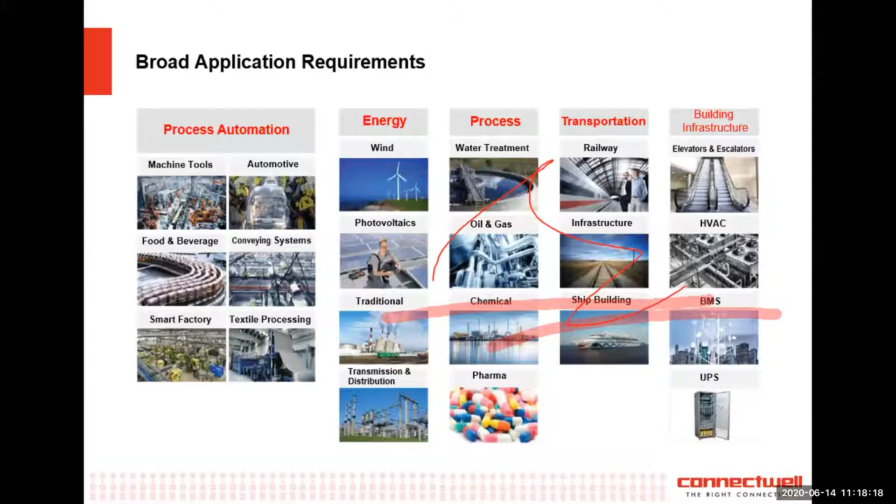Getting into where all we sell, these are the broad level sectors where we are present - process automation, energy, process, transportation, building infrastructure. The products find a very varied use. We are present in a lot of systems. It's a basic necessity for any sort of automation, power sector, engineered products, and hence our types of customers are varied. We have a vast range of industry segments that we cater to.

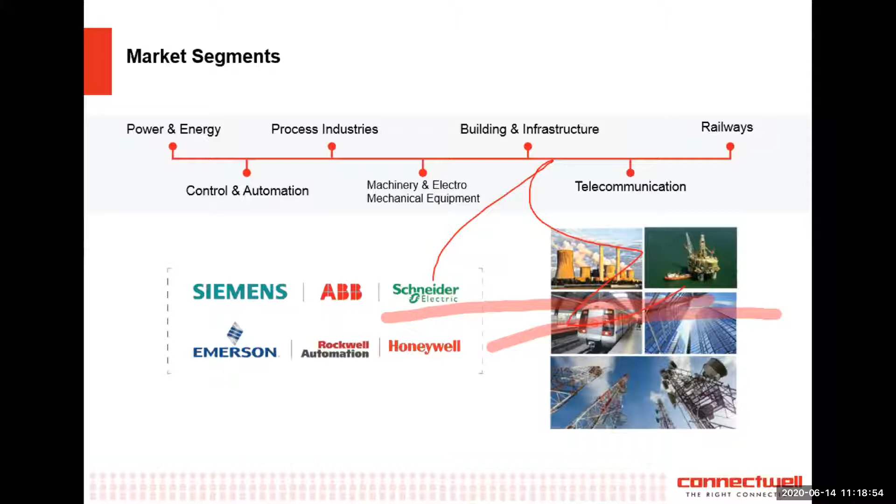From power energy to control automation to process industries, machinery and electromechanical equipment builders. We also are present in the building infrastructure area, and of course railways. We cater to a lot of leading industry people. For example, in the power area, we supply to Siemens, ABB, Schneider, Larsen and Toubro. In process areas, Emerson, Rockwell Automation, Honeywell, Yokogawa, a lot of machine builders, and also the rail transportation area.

We are present in India in a very wide network. We have over 140 dealers now, so that we can service our customers and be close to you. We have 7 regional centers all over India, right from Delhi, Ahmedabad, Pune, all the major cities, Bangalore, Chennai, Calcutta, Hyderabad, Coimbatore, and then our distribution network - Sriramji just touched upon this.

We supply to more than 60 countries now. We have our fully owned subsidiary companies in China, Brazil, and the United Arab Emirates as well.

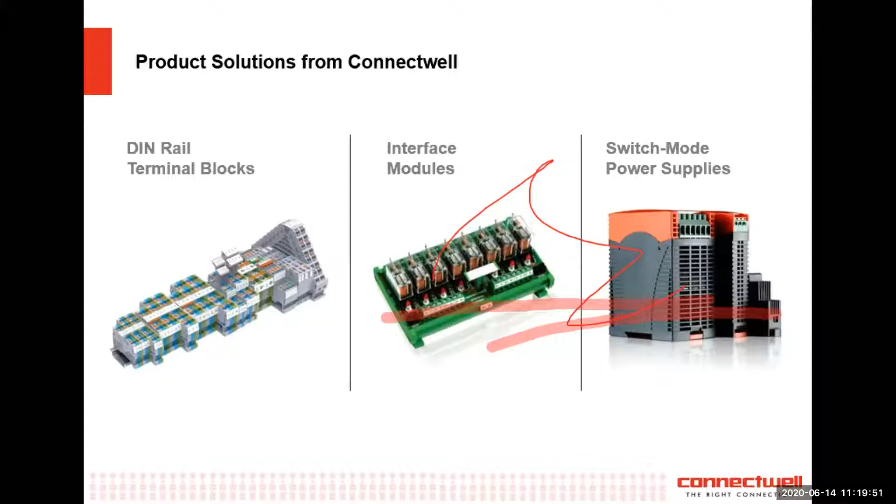Regarding products, we'll not get into it much, but at a broad level, we are industry leaders in the segment of DIN rail terminal blocks. We also have a huge line of interfacing modules that you can choose from, and of course switching mode power supplies.

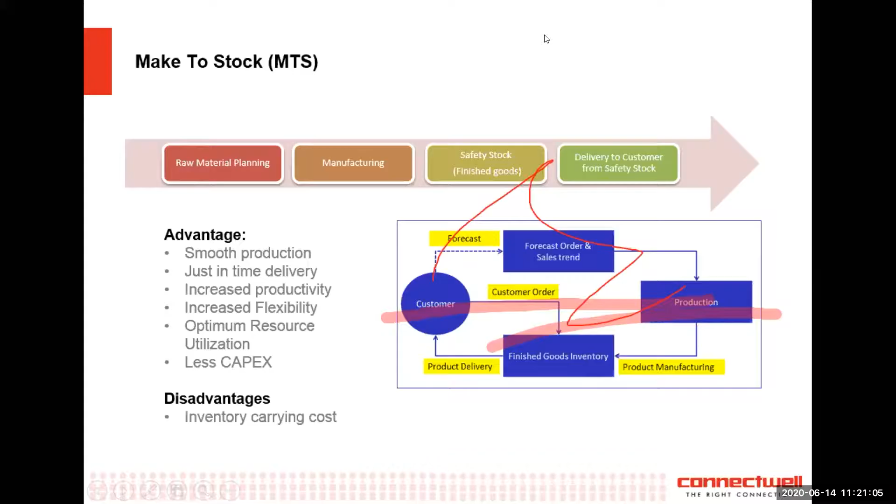Does everyone see the red mark on the screen? Like a sketch mark? Okay, so I need to - Dheeraj, any idea how to take it out? You need to go to your viewing options and disable participant annotations. I did that, but how do I get this red mark out again? Should I stop sharing and then share again? You have to stop share, then share, it will disappear. Okay, everyone please excuse me, I'll just stop sharing and reshare my screen so these red marks - it's a Zoom thing, we see it all the time. Just give me a minute. Okay Ishwar, you can see it, now the red marks are gone. Over to you, let me know when you want me to proceed further.

To handle it, we are following the MTS methodology. For MTS methodology, these are mainly 4 steps we are following - raw material planning, manufacturing, then safety stock, and delivery to customer. If you see the 4 lakh terminals as explained by Sandeep, there we have to arrange like 8 lakh screws, 8 lakh clamping yokes, the raw material required for the clamping yoke like steel, copper, and the plastic material like polyamide 66 required for that material.

For raw material planning, we are using the planning methodology that I will explain in next slides. Here, if you see the make to stock, generally it flows - we use the customer forecast as well as our internal analysis of sales trend. On that basis, we decide the safety stock to be kept item wise, and we review every month for any variations in that. After having the sales trend analysis, we decide the safety, and on that safety or stock basis, we decide our production.

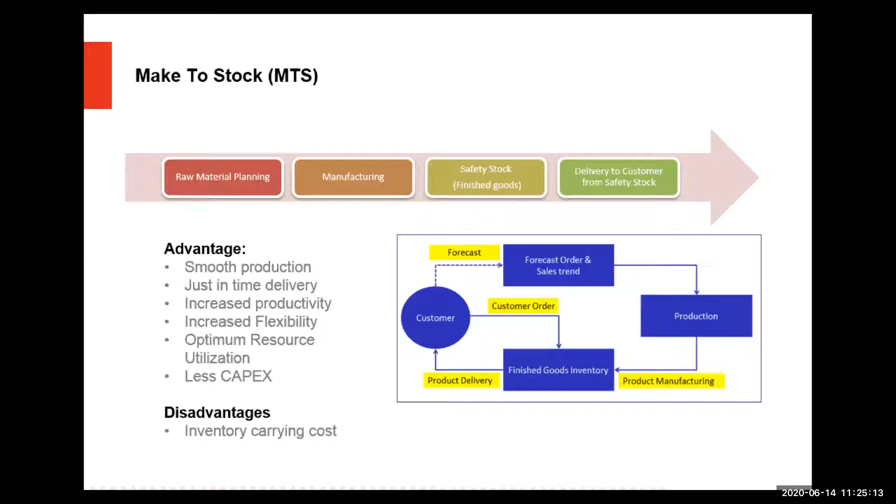Sandeep, please go to the next slide. Yes, one second, it's frozen for some reason. Just okay, got it, one minute. Yes, I got it, okay.

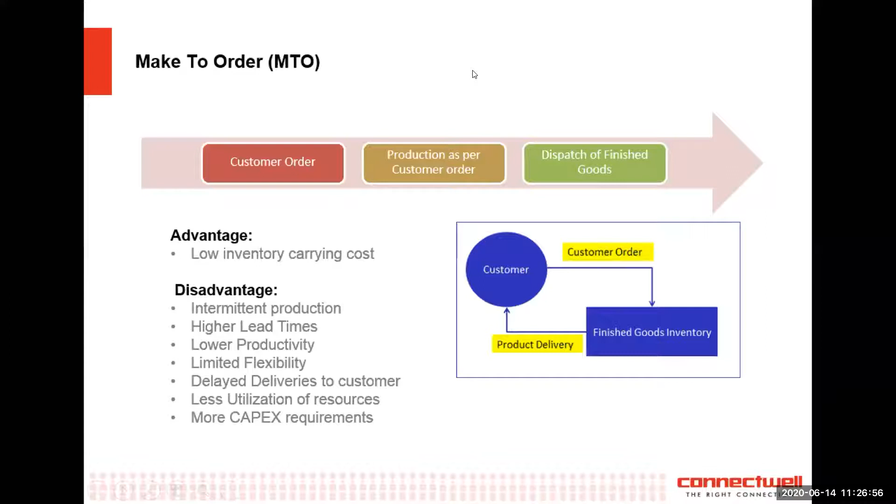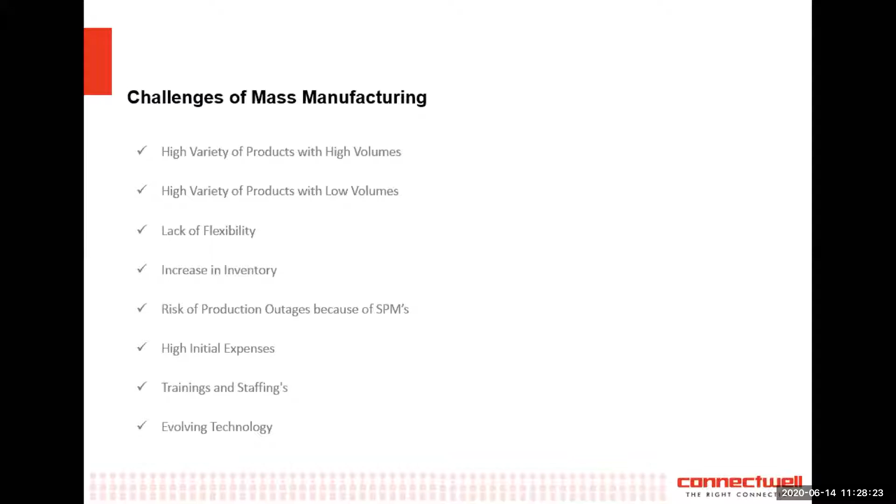And then yes, to run the SPMs or high-end machines, staffing and training is very, very important. So we need to engage our people and keep our workforce motivated. And yes, the mass manufacturing enterprise always has to keep watch on evolving technology.

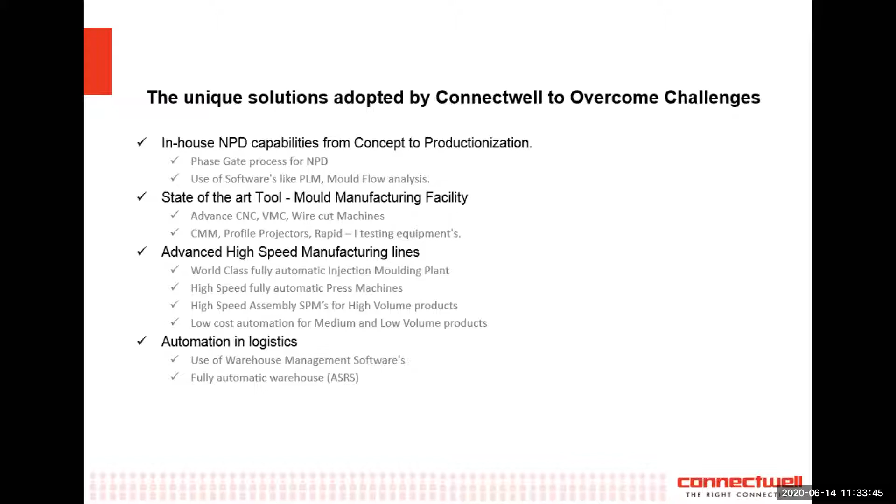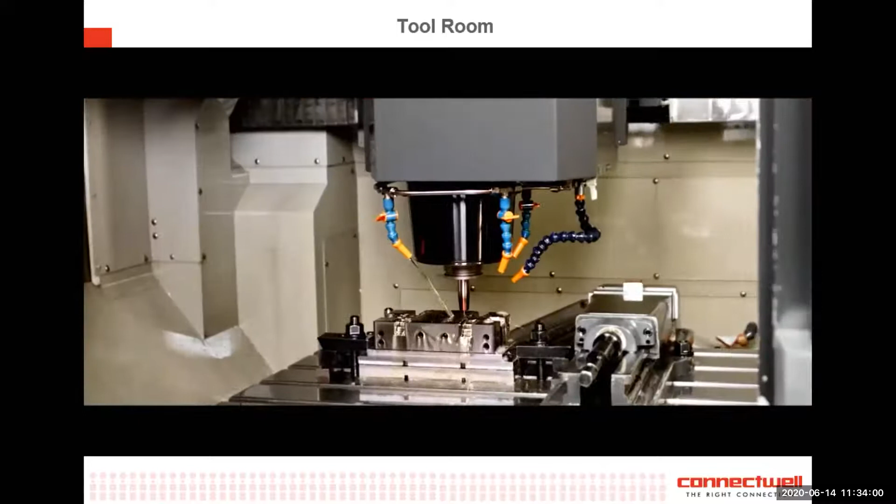As Ishwar explained, on tool manufacturing itself, there is no audio on this video, so I'll be just speaking over what you see. The precision of making molds and sheet metal tools is important.

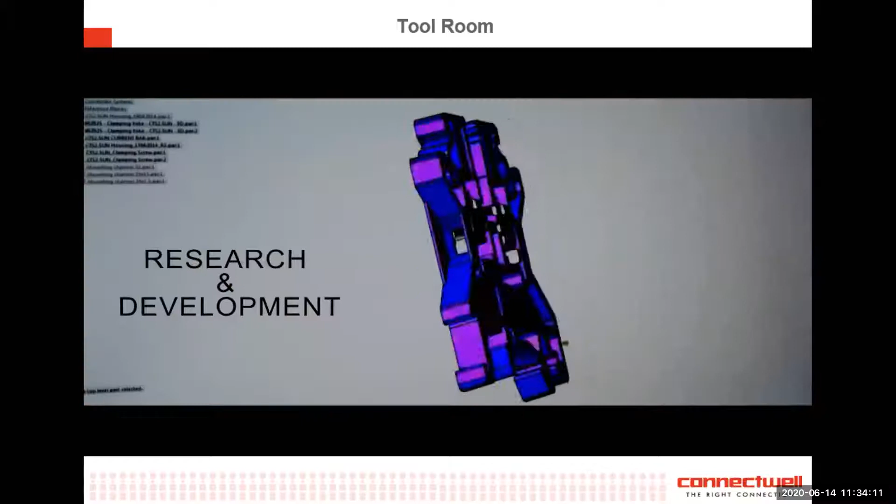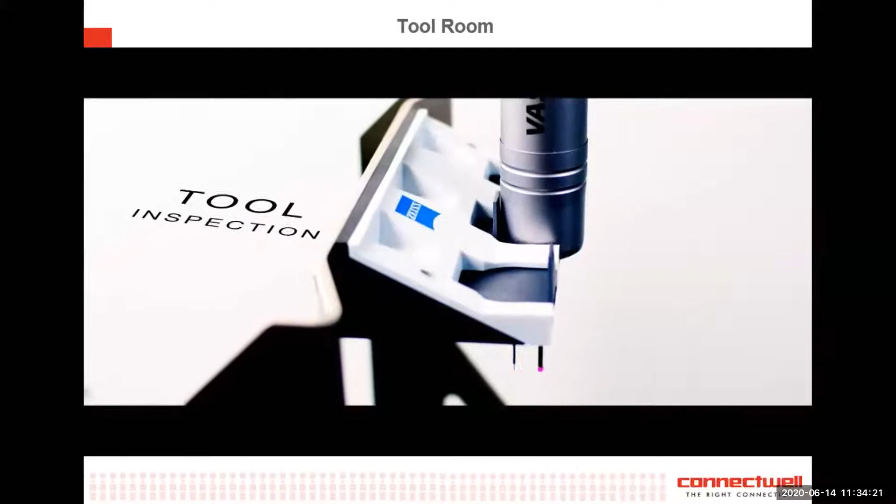We have made to the least count, so we make to the accuracy of 5 microns in our tool room. As Ishwar mentioned, it is very important, especially with software like Moldflow, to have a fully equipped tool room to support not only new product development but also the constant wear and tear of the manufacturing lines. There are a lot of breakages, and the tool room comes in very handy to support your online manufacturing processes.

Had we not had a tooling facility, it would put us at a severe disadvantage. So that was about our tool room.

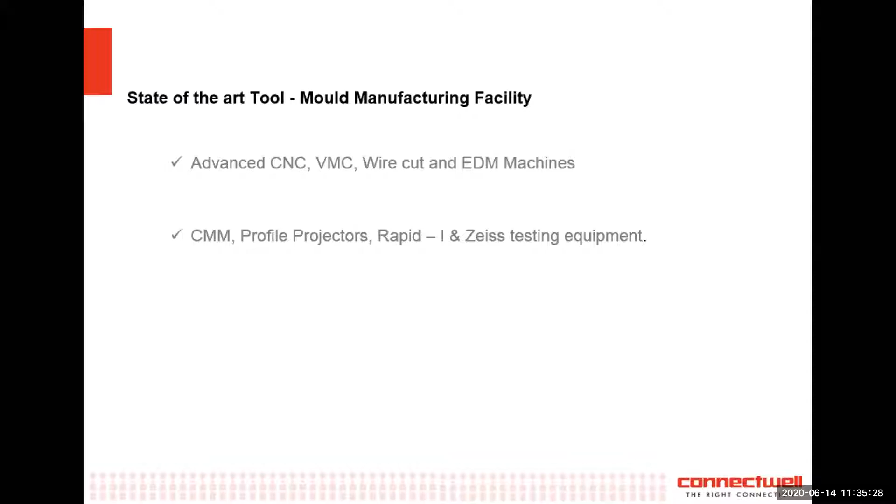As Ishwar mentioned, we have advanced CNC vertical machining centers, wire cuts, and EDMs. It's not just important to have good, high precision machines, but you also need high precision testing and measurement equipment. We recently purchased a very nice Zeiss system for 3D measurements. You can have very high precision equipment and make parts at really high micron accuracies, but you also need measuring instruments to measure those high precision produced parts. So it goes hand in hand.

This is an overview on the injection molding plant, Ishwar.

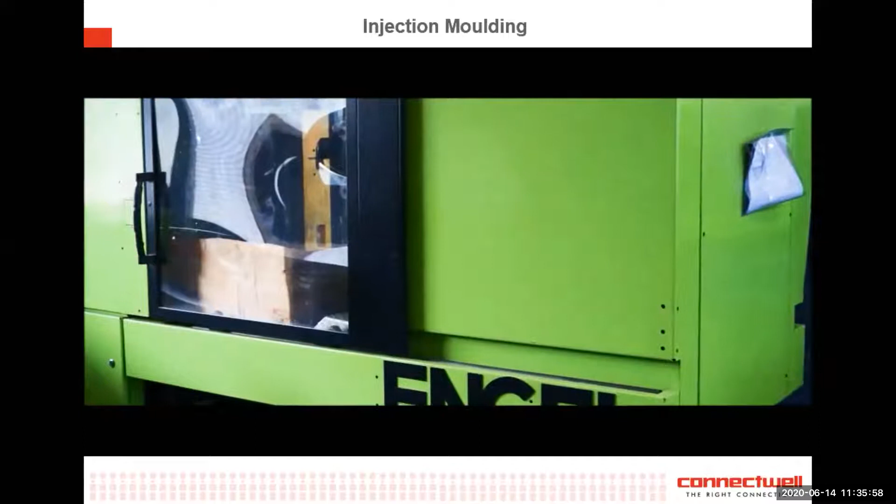Okay, so this is the video of the injection molding plant, an overview. As I said, this plant is fully automatic. If you see the pipes on the wall, we are supplying raw material to the machines also with automation, and we have these machines ranging in tonnage from 50 ton to 150 ton.

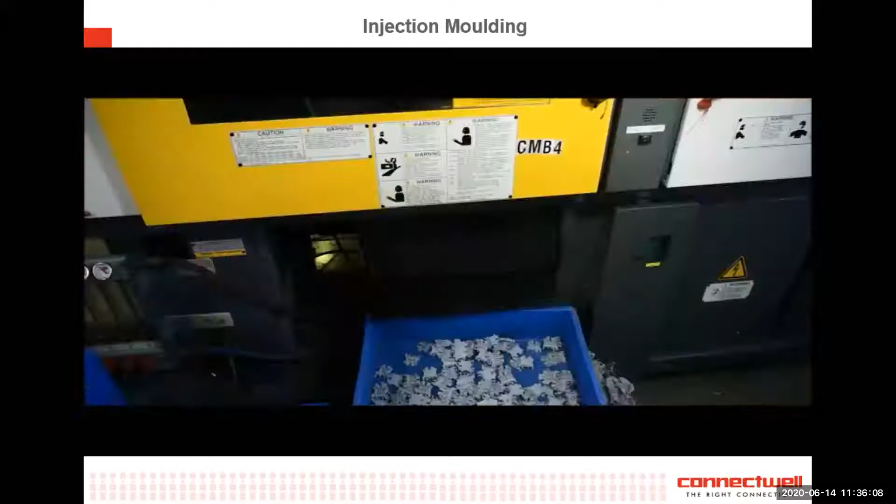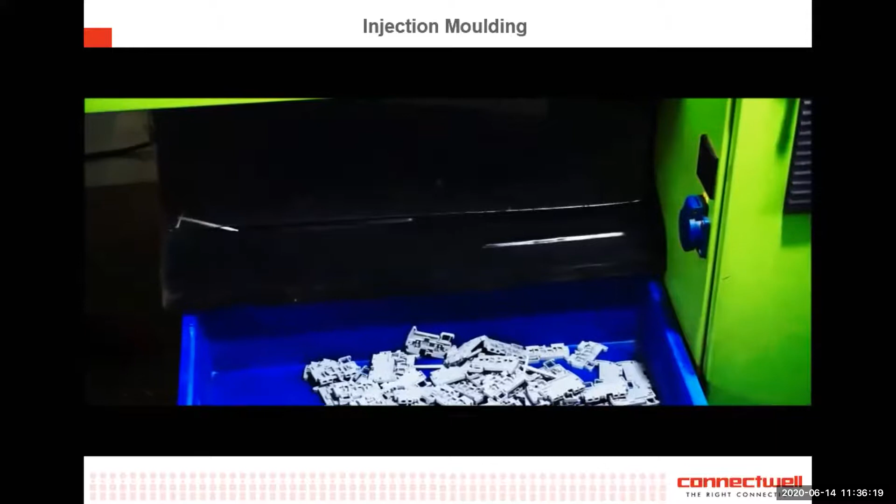These machines are fully automatic. We can get the process parameter data from these machines to identify the root causes of defects. On these machines, we are running molds with as minimum as 6 to 7 second cycle time, and the molds range up to our latest 8 cavity molds for our high running product. As I mentioned earlier, we have in-house capability of tool manufacturing, so we can think in that direction, and mold flow analysis tool room capabilities support us for the manufacturing.

So for high volume products now, just to add to what Ishwar was saying, imagine, a lot of you have used our CTS 4UN, the bread and butter product that pretty much goes into every cabinet. The CTS 4UN is an 8 cavity mold, so 8 4UN plastic shells fall down with a cycle time of 7 seconds. So every 7 seconds we produce 8 plastic housings of the CTS 4UN product. This kind of gives you an idea how we add up to this volume.

Please also keep in mind that this has to be a non-stop continuous process. Any sort of stoppage severely disadvantages us. As a matter of fact, we didn't cover it here in our presentation, but almost half of our injection molding shop, we have nearly 26 machines, and nearly 13 of those are actually connected to a UPS system, because we can't allow even a single microsecond of stoppage. Knowing power quality levels in Dombivli, it's not the best, it's connected very well, but power quality is always a topic, so we've connected half of our mold shop to a UPS system. It's a huge battery bank, just so that if we have a power outage, the machines don't stop.

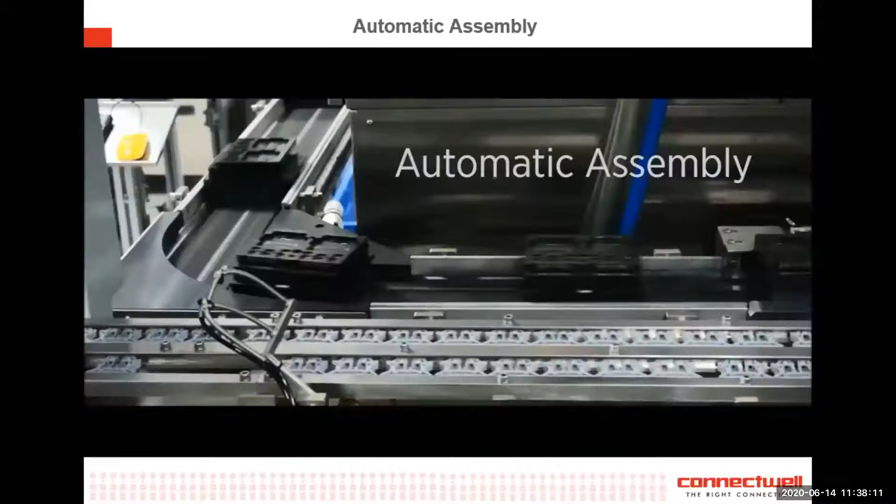Also, these are all CNC machines, so they need good clean quality power. So Ishwar, again, this video is related to our automatic assembly machines.

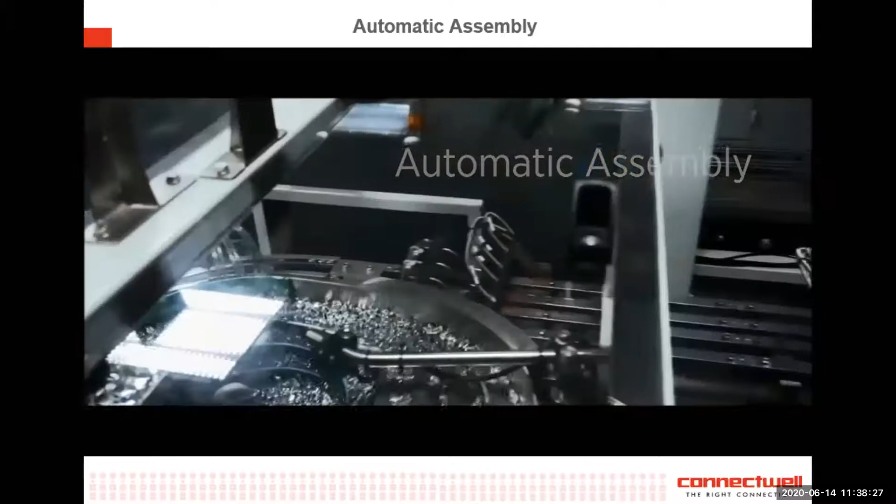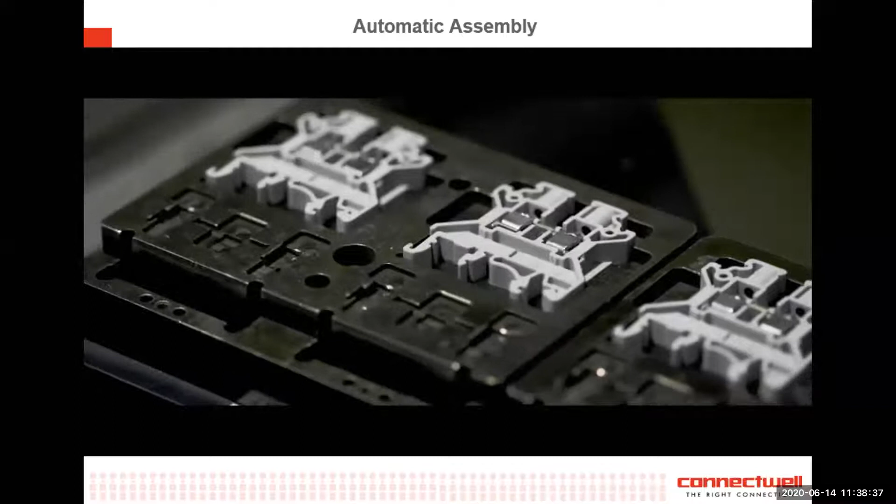As Sandeep explained, this machine is for CTS 4UN only. On this machine, all parts go into the machine automatically, and it gets assembled automatically. It is literally a manless machine. The person's job is only to feed the parts into the bowl feeder, and the machine takes those parts and assembles them in minimum time.

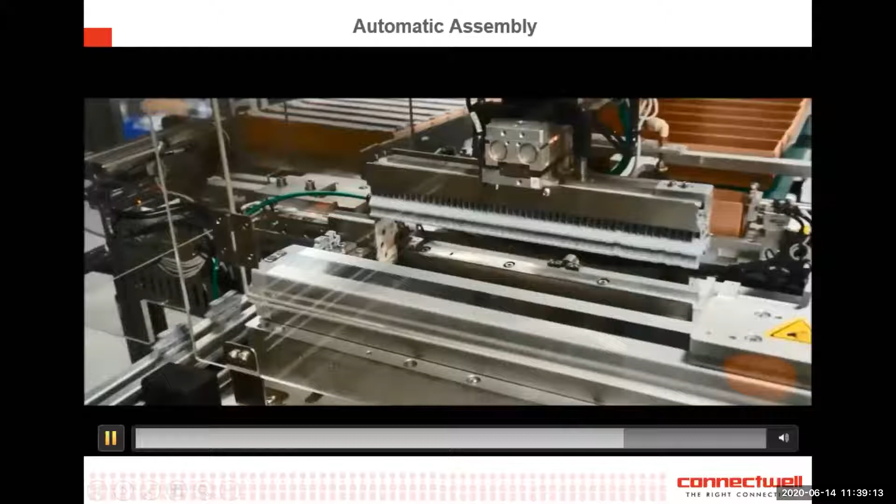On this machine, we are producing around 70 to 75,000 parts per day, and also on this machine we are doing the tray packaging. If you observe, the CTS 4UN comes into the tray packaging and then the outer box. We are packing that product on the machine itself in the trays, where the product goes into the trays automatically, and then the person only takes those trays and puts them in the outer box.

Such type of machine we have sourced internationally from the international market, as well as from the Indian market. And as I explained, now we have our internal SPM building capability also. For now we are going for smaller machines, but in some days we will have our own fully automatic SPMs also.

So we move on to the next bit. Just to give you an estimate on volume, in one day alone we can produce 70 to 75,000 4UNs. Anytime we get these peaks or surges or sudden demands, we are able to absorb those shocks, and our processes can then take care of it.

To give a general idea, I'm using the example of 4UN because this is the most widely used terminal block in all your control cabinets. In a year, we produce close to 1 crore 80 lakh 4UNs. That's the volume that we produce.

The automatic lines have built-in inspection and testing as well, so every single product is inspected and tested. There is a rejection bin also, so if the parameter is not met, the machine automatically rejects it. Every single terminal block you're getting is 100% inspected. In fact, after the box is made, we don't even do any quality inspection, we just put the label and ship it to you. Of course we do some sporadic visual inspections even after the automatic lines, just to be double sure. But this is the level of quality system we have incorporated within the automatic line itself.

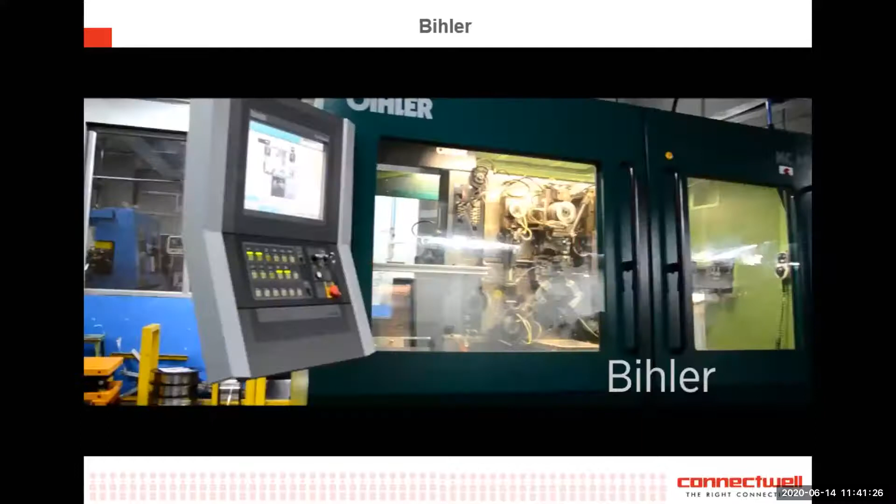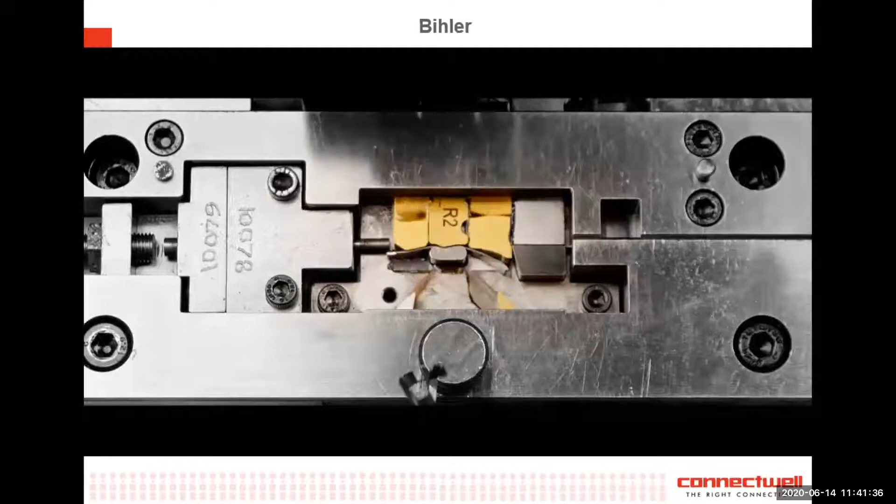So we move on to the next one. This video is related to our press machines. We have a high-speed press machine, with a speed of around 450 parts per minute. Here you will see the spring manufacturing, so we are manufacturing springs as well as clamping yokes. A majority of our sheet metal products we are manufacturing in-house, so we have such kind of machine.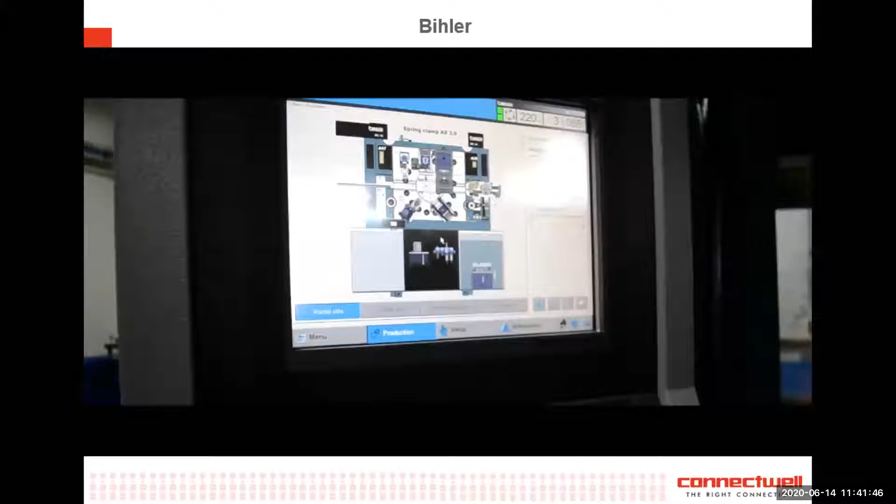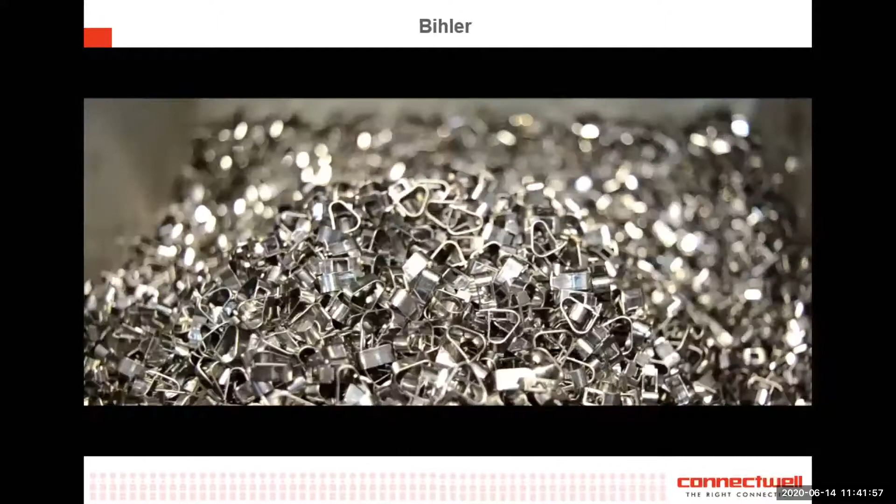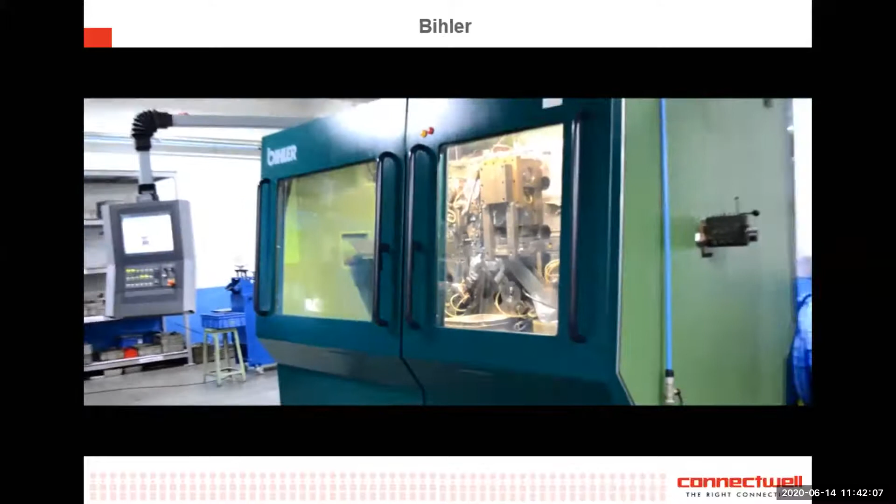As explained for the automatic SPM machines, these machines are also coming up with all the pokayokes or mistake-proofing, so that all defects can be identified on the machine itself. It will not get mixed with the good products.

Just to add, the Bihler machine you saw is a high precision, high performance machine from Germany. This is mainly used a lot in the switchgear industry, so all your circuit breakers, ACBs, MCBs parts are typically manufactured on such kind of Bihler presses. These are, needless to say, very expensive systems, but somewhere down the line my dad would explain, when asked about the reasons for our success, that these equipments are classic cases of how having good equipment helps us build good products.

By the way, we bought our first Bihler back in 2006. I think our total company turnover back then was somewhere close to 40 crores, and the equipment itself cost us 6 crores. So to make an investment of this level was a pretty high investment. Today we have 3 Bihler machines inside our plant, but it just goes to give customers reassurance that every single part going into the connector is of high precision, high quality.

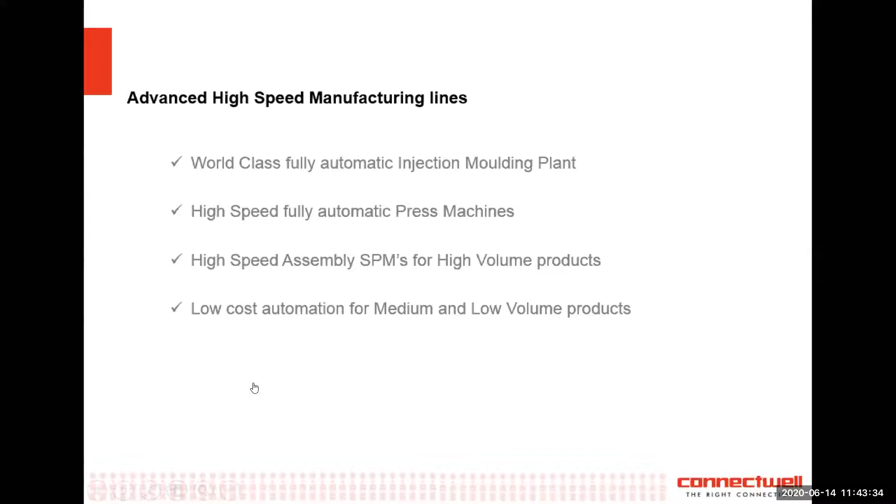Yeah, so we go on further. I think that was the summation. Yeah, that is the summation of what we discussed in the videos. Okay, I'll go on further.

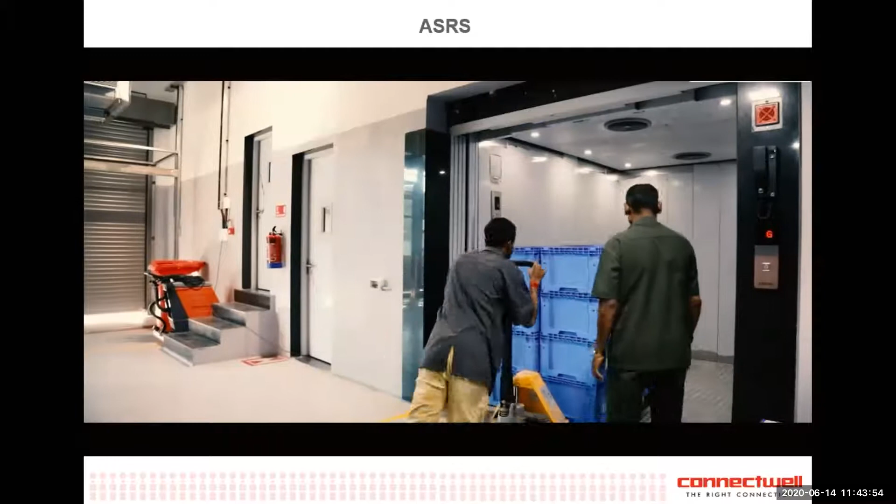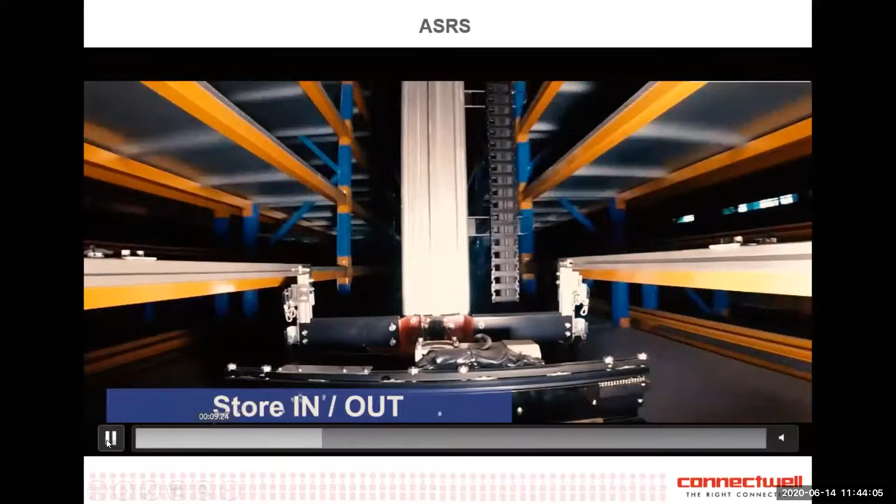This video is related to our automation in logistics. You must have seen videos of Walmart, Flipkart or Amazon's fully automatic warehouse. We are following that methodology. When we receive material in our plant, we keep it in our warehouse, which is fully automatic. It's a multi-story building kind of warehouse, a 3-level warehouse where we are storing all our FG parts as well as raw material parts.

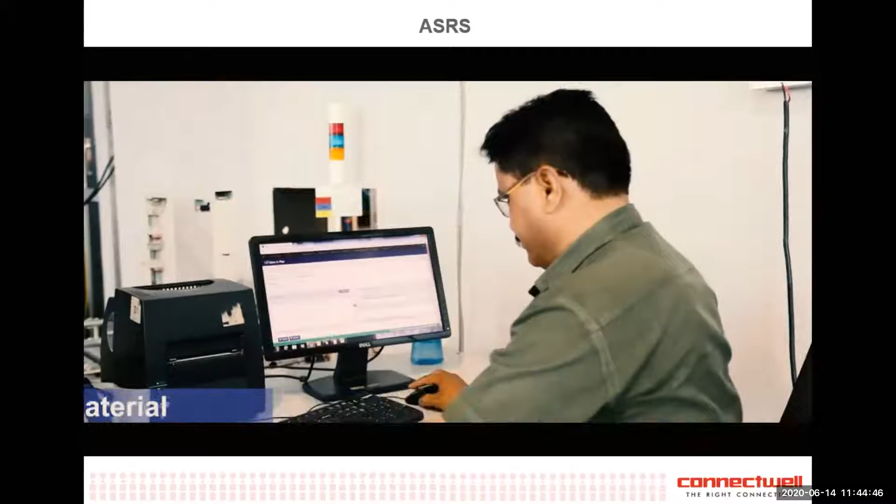Once material gets into the company, we put a barcode on that particular product, and because every product is barcoded, there is no chance of manual mistakes. We use the scanning methodology along with the warehouse management system. So when we get the product, we put the barcode, then that product goes into plastic bins, and these bins go into the warehouse, which is fully automatic.

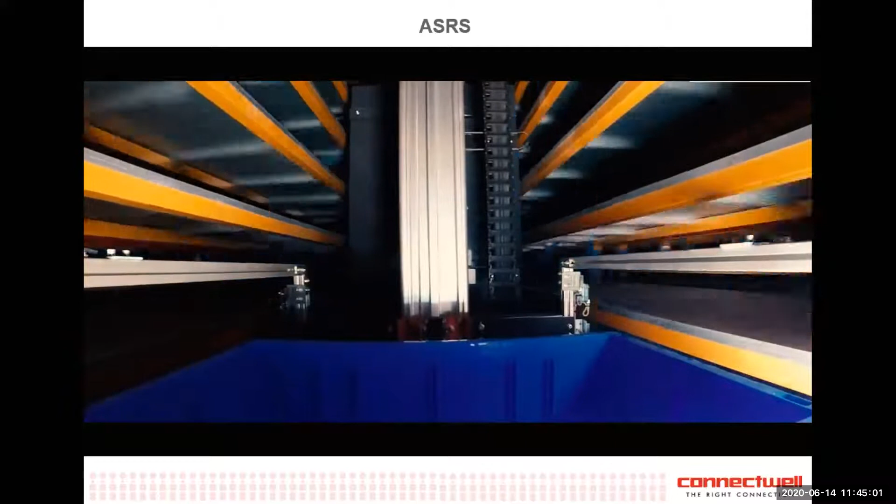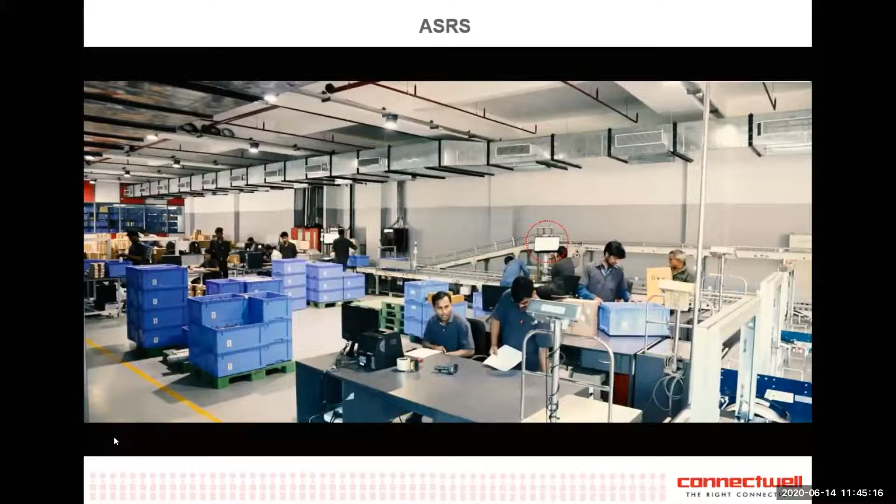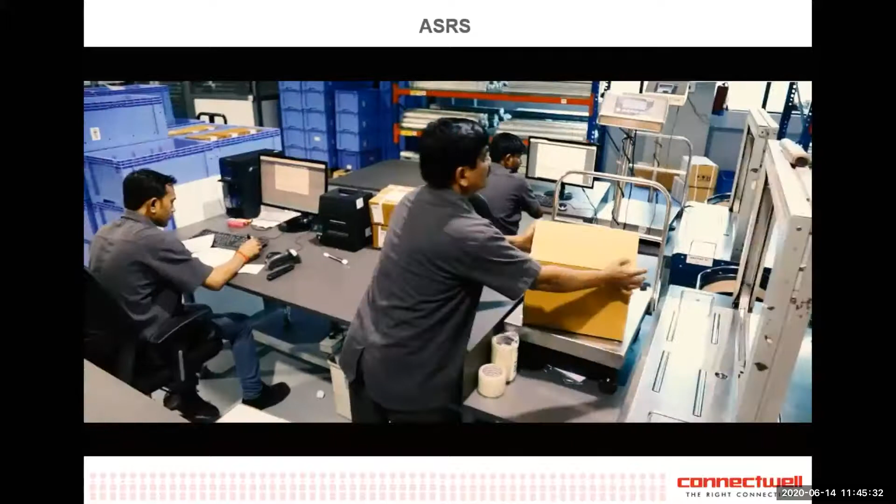When we require the product, we generate the delivery challan for that product in the system. That system gives an automatic command to the ASRS system, and once the operator enters the order on the computer, that product comes out automatically. The operator gets that product, scans it as per the customer order, and puts it into the cartons. After scanning, he puts it into cartons and the cartons get packed. After packing, on every carton we put the barcode as well as the item description. This is generally the process followed by big giants like Flipkart and Amazon.

This facility we are following, and the beauty of this system is it's an errorless system. First thing, there's no chance of sending the wrong product to the customer. Second thing is accuracy. And third thing is the human or manual dependency, which gets avoided because of this system.

Just to add to what Ishwar said, this automated warehouse went live in February 2019. It is fully integrated into our ERP system, so the WMS, the warehouse management software, talks to our SAP ERP software. It's a fully integrated system. We are the only company in India to have this kind of mini-load automated warehousing system.

Typically, the other automated warehouses you see are usually for pallet loads within the country. I know for a fact Polycab has one, and a lot of other big industries have these things. But for small parts, for small bins, for parts stored in bins, this is the only system existing as of today in India. We hope for more such systems to come across the country as well.

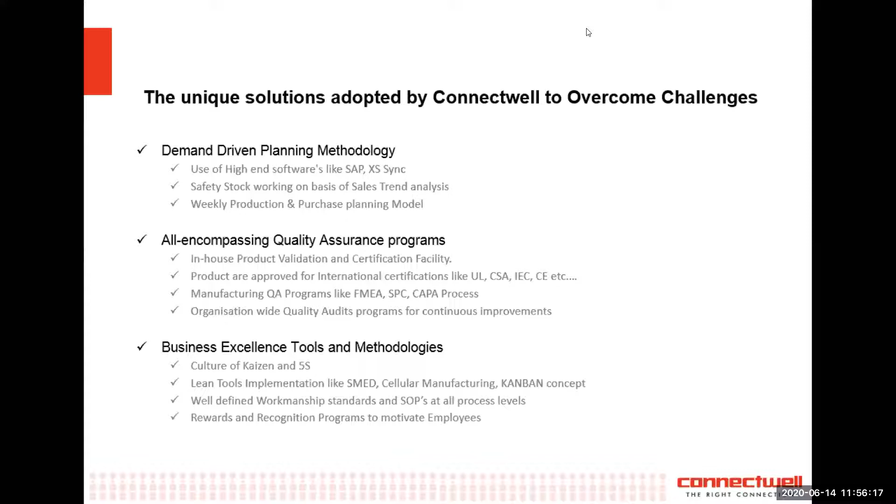I will shift gears now and also get into how to sell these make-to-stock parts. Yeah, so that's also a challenge. Let me see, my screen has frozen now. Let us see if I can go ahead.

Okay, yeah, so challenges in sales - we managed to make 4 lakh terminal blocks per day, but to sell 4 lakh terminal blocks per day manufactured is again a fairly challenging position to be in. I'll just briefly say what challenges we come across.

In the domestic market, it's a saturated market, unfortunately, and we are in the same boat as all of you. The market growth is not at a point which would sustain active investments from all of us. I believe you've discussed this in your previous webinars too - saturation in the domestic market is a big challenge we face, along with fierce competition from domestic and international players.

Global giants operate in India with their product lines, good product lines, so it's a fairly challenging situation. Also, as Sriramji touched upon in the introduction, how do we go about in the international arena? The world is coming into India, and how does India go out to the world? Our Prime Minister has also highlighted local for global. So how do you achieve this global marketplace?

To give you an idea, we've done some estimates on the terminal block market globally. I know it's a huge figure, but the global market for terminal blocks alone is close to 12,000 crores. That's the volume that exists in the globe. India may be around 300-400 crores. So the world is a fairly large space. There are huge buyers in Europe, in North America, in China.

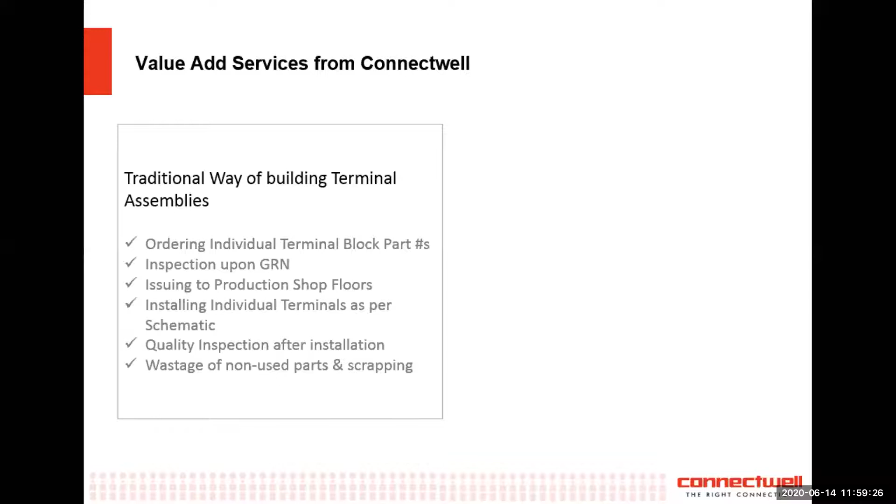There is a smarter way of doing terminal assemblies also. This is the value-add service we offer all our customers: essentially create a drawing of the assembly. All of you create drawings as well, but we have a free software available on the Connectwell website. You can download it and create terminal assemblies. Hit the RFQ button, we will receive the assembly with a clear bill of material, and we can then ship you a completely assembled terminal block rail assembly.

So it's a DIN rail with some terminal blocks and a lot of blank space also left. Once you receive this assembled product, all you need to do is bring it into your system with 2 screws and install it on your cabinet. That's it. You don't need to manage the marking tag, the small jumper, the numerous end plates, partition plates, the accessories needed to make a complete rail assembly. As a result, you have zero wastage of parts - quick installation, quality control done, and zero wastage. That's the level of value add you can expect from Connectwell.

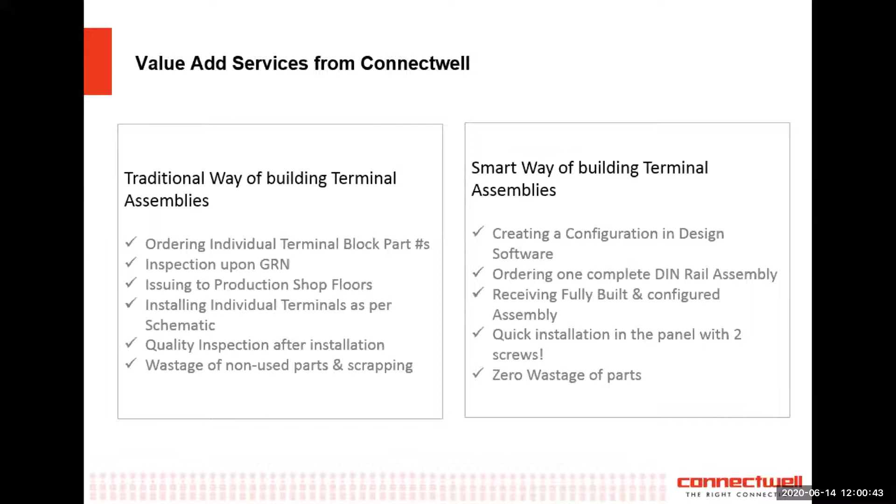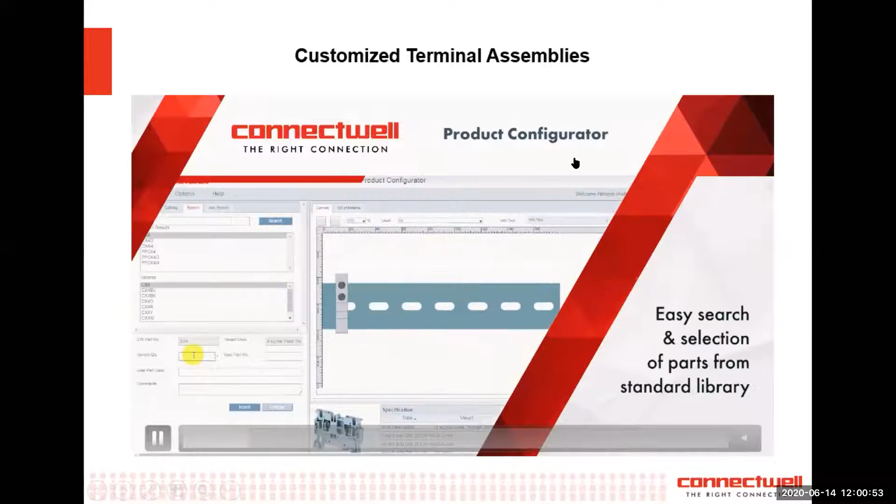Of course, this is just to show you how we do it. Essentially, this is the software available online. You just download it and then create on a canvas.

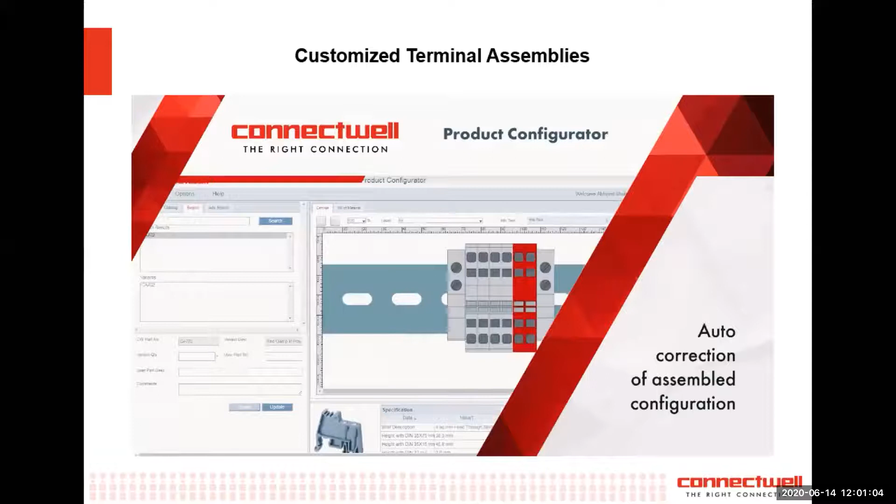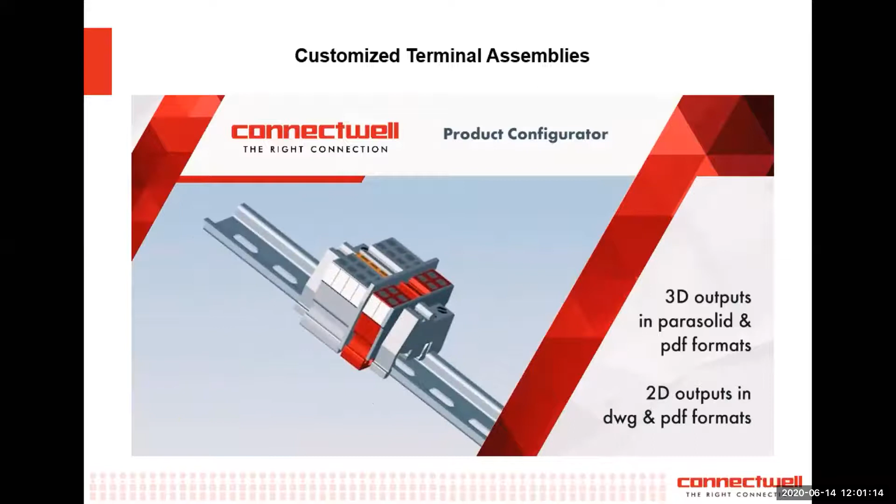Am I audible? Dheeraj, am I audible? Yes, okay. Yes, go ahead sir. Okay, yes, thank you. The screen is frozen. Is it visible now? The screen is frozen. No, it's okay sir, now maybe it's okay. It's moving sir, yeah, it's moving. It's moving, so must be your connection if you're experiencing lag.

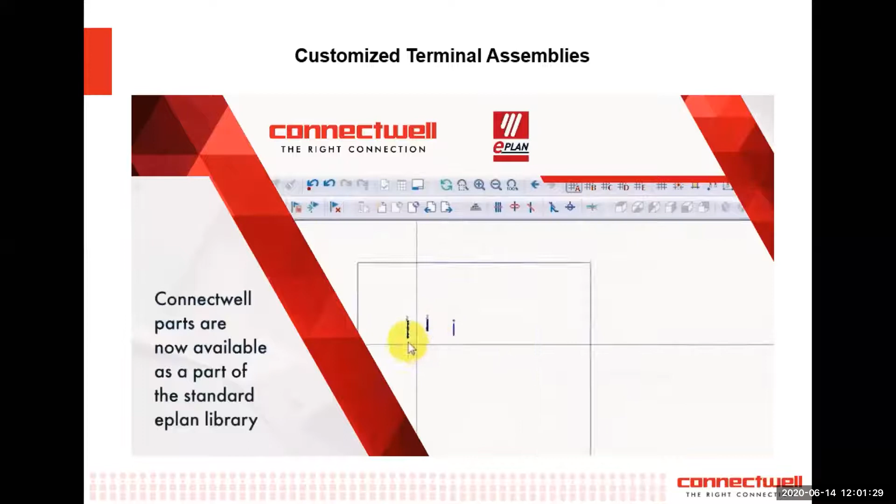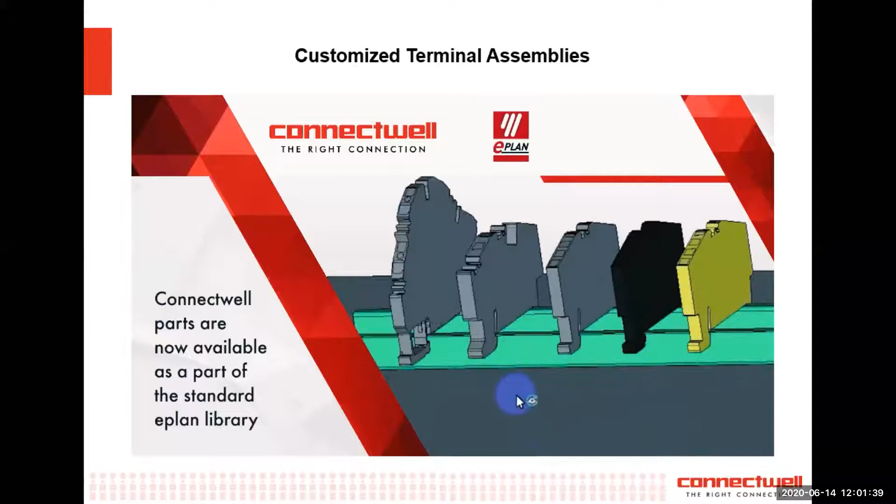We are also listed on ePlan, as a standard library part, so anybody using ePlan will find Connectwell parts in the standard library as well. Essentially, what you do is create a drawing with a complete bill of material, send it to us, and we send you a complete assembly which looks something like this. Then you just install this assembly in your junction boxes, in your cabinets, and save on stocking of parts. It involves a little bit of planning, but if done properly, you get a completely assembled, inspected part for your cabinets.

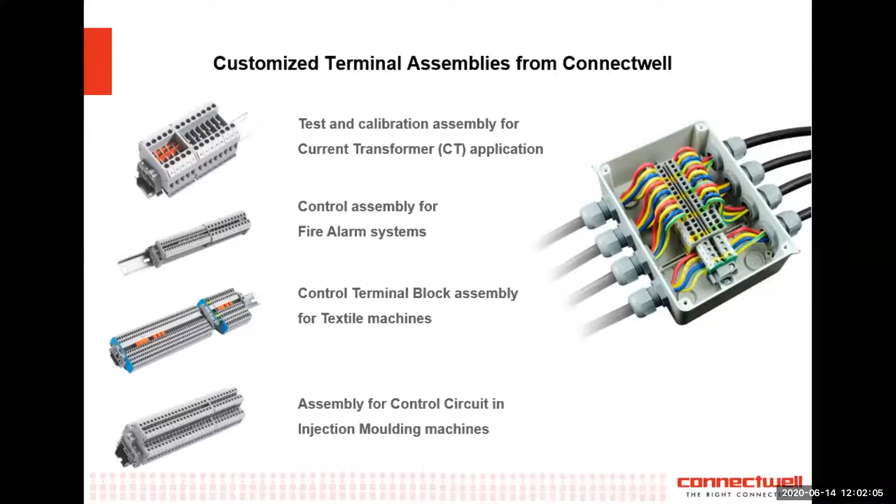Moving on, this was about the domestic area. As mentioned earlier, we do export, and we export quite a bit. Nearly 35% of our revenue, of the company revenue, comes from international markets.

How we started in exports is a story I leave to my father to explain later. But essentially, we have a small export team within the sales organization. This team is responsible for generating newer accounts and new leads, so we participate in a lot of exhibitions and conduct seminars outside of India.

Of course, these are all pre-COVID strategies. Post-COVID, we have to completely realign even our export strategy, because all of this doesn't work if you don't have airplanes flying in the skies. You need to send people, travel, and meet people. Now we are trying to figure out what the post-COVID strategy is for selling in the international arena.

To sum up, we used to exhibit a lot, and our team did a lot of lead generation. Google is one of the best and cheapest methods - running searches worldwide, focusing on certain countries, and looking out for electrical utilities outside of India. We also try to understand if a particular country has a specific utility dictating the specification, so we need the relevant approvals as well.